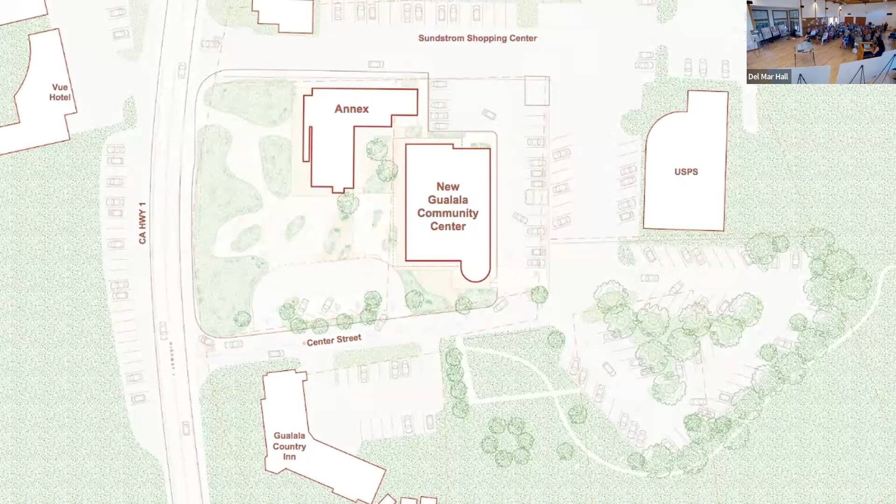In our proposal now, we are working under the purview of a rebuild, which allows by code a 10% increase in the floor area of the former community center. We've been in conversations with the planning department early on, and we have the opportunity to stay within the confines of the site, but we're able to shift the building down to take advantage of the views towards the Pacific without having to go through coastal commissions. This was a major win for us, because as you know, coastal commission takes a long time. We probably won't be around when it actually starts.

By shifting this southeast, we're able to conceal the parking that is much needed and necessary, but really take advantage of this new plaza that we've been working with our civil engineers and landscape architects to really make this an outdoor community park. This would start to frame the relationship between the new building and the ocean, but also create a new, more intimate courtyard with the annex that's there. This would be a multi-purpose space.

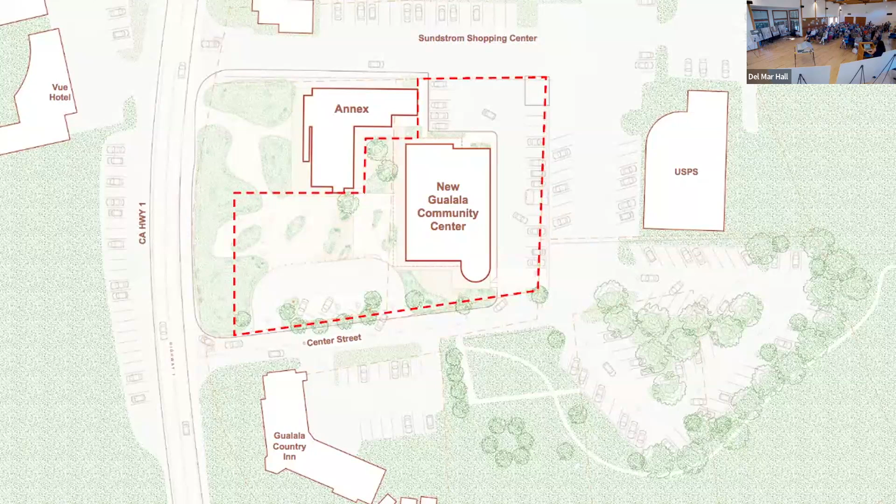We're also considering adding 65 additional parking spots for overflow, which historically there was never enough parking. So we thought this would be an opportunity to incorporate that in a more organized manner and provide more ADA parking spots than before, and also address some of the other issues in the site that needed to be addressed.

One other aspect we wanted to share and clarify: as part of this rebuild, we're also thinking about the project as a community resilience center. This definition is from the state definition. What we've discovered is there are many funding opportunities as well if this building were to comply with these requirements.

So this is not just a community center, but it's also a place for emergencies in the event that people need to come together. Part of these requirements involve being ADA compliant, gender neutral restrooms, and other infrastructural items fitting with today's standards: backup power generation, potable water storage, etc. By doing this—we'll go into more detail about the building—that just allows us to broaden our funding opportunities as well.

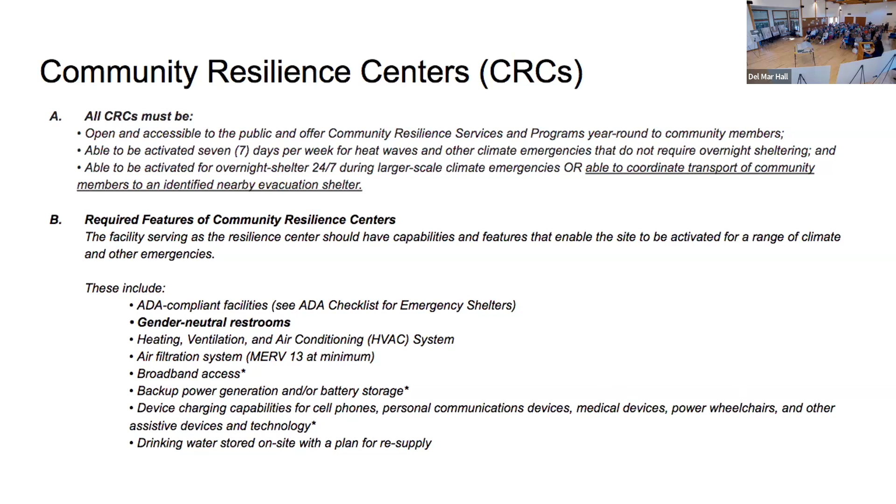And now James will walk us through the interior. Okay, I will talk about the plan organization for the building.

From a very high level, the building is composed of essentially two buildings in one. To the bottom of the page, you can see what is a large assembly hall. Separating that from the service bar at the top of the page is a gallery, and that gallery is the main circulation artery through the building, providing a kind of north-south axis. Most of the supporting service programs are on the top of the page, to the east, and the assembly halls are on the other side. That's the overall view of how the building is organized.

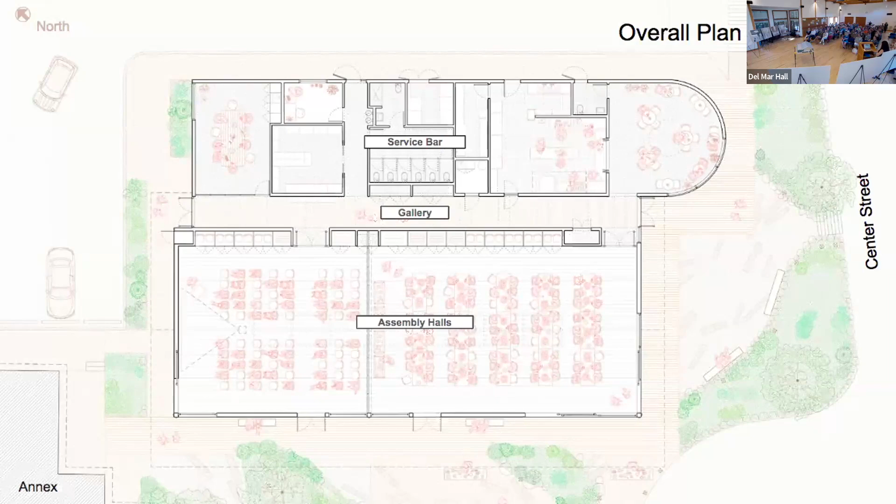We can go to the next slide. First, talking about the assembly hall: this is a flexible space for large assemblies. Part of what makes it unique is that it's capable of being subdivided into two spaces. What you're seeing here is an operable divider, a partition, that can help split the hall into a medium hall and a large hall. That flexibility was important because often there might want to be multiple events taking place of different sizes.

In this particular plan image, we're showing something like a dinner, a crab feed, in the large hall, and a movie screening in the medium hall. But you can certainly imagine many other types of activities could occur. If the operable divider is pulled back, it becomes a singular space which can accommodate a much larger audience.

Another aspect of this assembly hall: on the top of the page, lining that east side wall, is a continuous line of hall storage. Tables, chairs, a movable stage system are all stored in there, so they're very easily accessible. We understand that the center is operated by volunteers, so we try to make it easy for them to pull things out and put things away. That's quite important, and we're making sure there's enough room for all the storage needs for these events. That's the assembly halls at a glance.

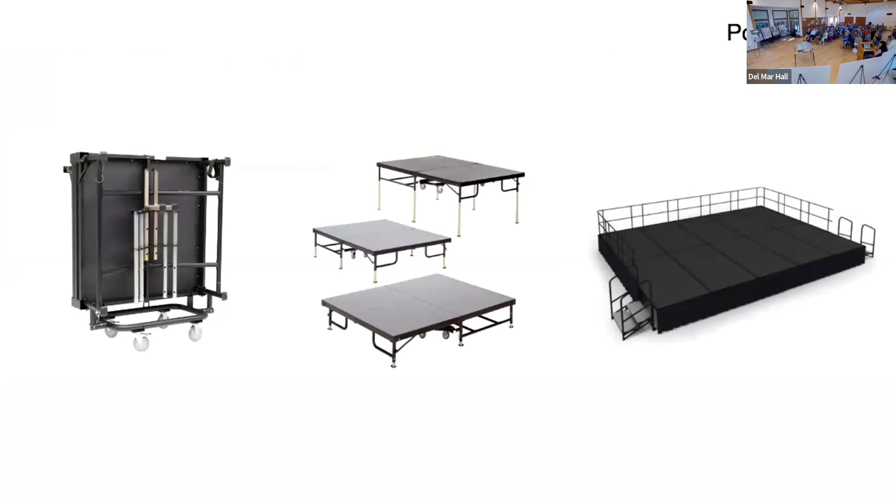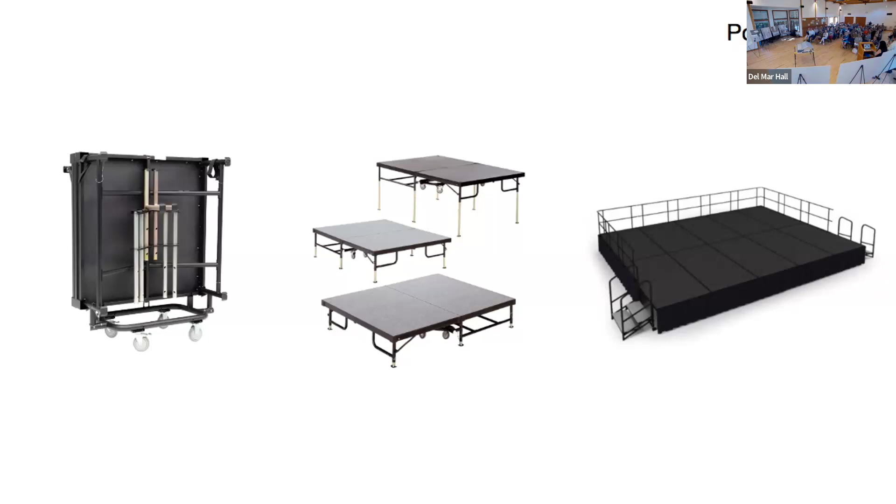This shows an example of what a movable stage looks like. The stage, when in storage, is folded up and on wheels, so it can be wheeled into storage and the space itself is much more flexible. When you need to have a performance, you can wheel them out, unfold them, and tile them together to create a larger stage, with dimensions flexible to the needs.

Moving on to the service bar programs. What you'll see anchoring the service bar on the two sides is a flex room and meeting room. Flexibility is really at the heart of the design. So if the assembly halls accommodate very large audiences, then the flex room and meeting room are used for smaller groups.

So even though we're calling that a meeting room, it could be used as, for instance, a yoga room, or a classroom for after school activities. The flex room is right off of the kitchen, so it can be a cafe if there's a luncheon with a smaller crowd. That's a perfect space to have direct access to the kitchen without needing to take up the entire assembly hall. Again, flexibility is at the core of how we program the building.

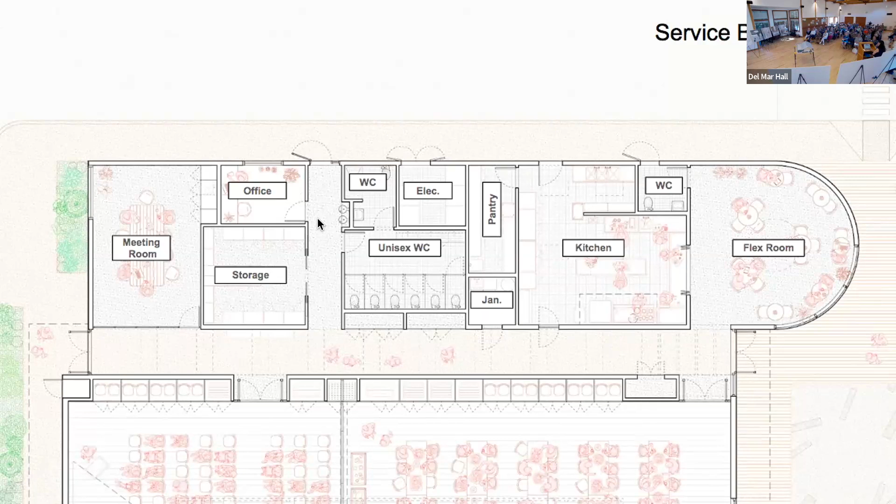Continuing to move to the left of the page, there is a service corridor that leads to a storage room and an office for staff. That rounds out the service bar programs.

Just for comparison's sake, it's important to understand how this new community center compares to the old one. The first set of columns describes the size of the previous community center. The main hall of that previous center was around 2,400 square feet, including the stage area, with an occupancy of around 165 people. For reference, this room we're in has a sign that says 158 occupancy, so that gives an idea.

With the new hall, the combined assembly halls have an area of almost 3,500 square feet, with an occupancy of 232. If we were to split the halls, the large and medium halls accommodate 136 and 96 respectively, and going down to the flex room and meeting room, 34 and 26 people. So we really created a series of public and community spaces ranging from small to medium to large to extra large. In pure numbers, it's about a 40% increase in size for the assembly hall compared to the old community center.

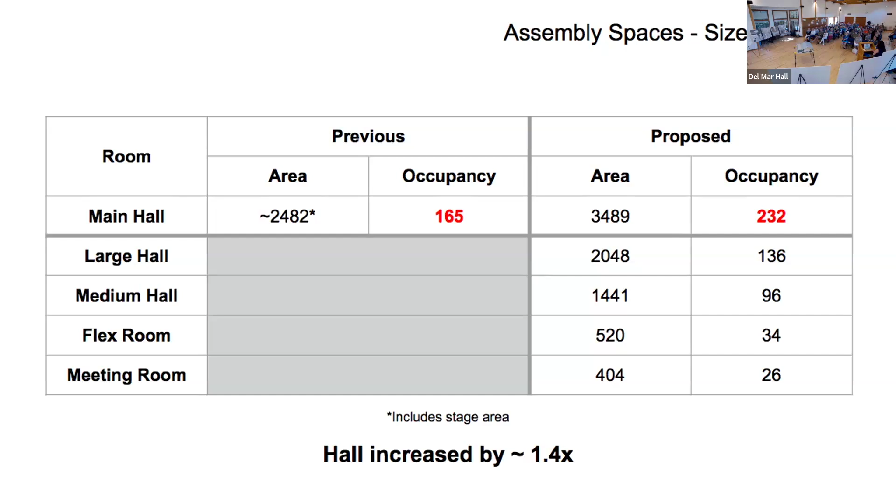Okay, now we're going to go to the bathroom and kitchen. I have the task of describing the bathrooms because we know everyone's really curious about these special rooms.

Let's talk about the big room, the multi-stall room. There are 6 gender-neutral bathroom stalls, each about 3 feet by 5 feet, and we're showing 3 sinks. Gender-neutral bathroom partitions are growing more common in commercial settings like airports and schools. Why we decided to do this was there was also, as mentioned earlier, the Resilience Center requirement, but also it's a way for us to gain a little bit more space, compressing all of these items so that we can gain more space elsewhere.

I want to show you - normally, growing up, going to school, when we had separated restrooms, there's usually about a 1-foot gap, which is fine if you're separated. But what we're trying to propose is to provide your own little room. So the gap between the bottom of the door and the floor is only a 1/2 inch, and the doors go floor to ceiling. The doors would have an occupancy indicator, and we're also thinking about making the restroom door glazed so you can see what's happening inside. These are attempts to give as much privacy as possible when you enter a multi-stall.

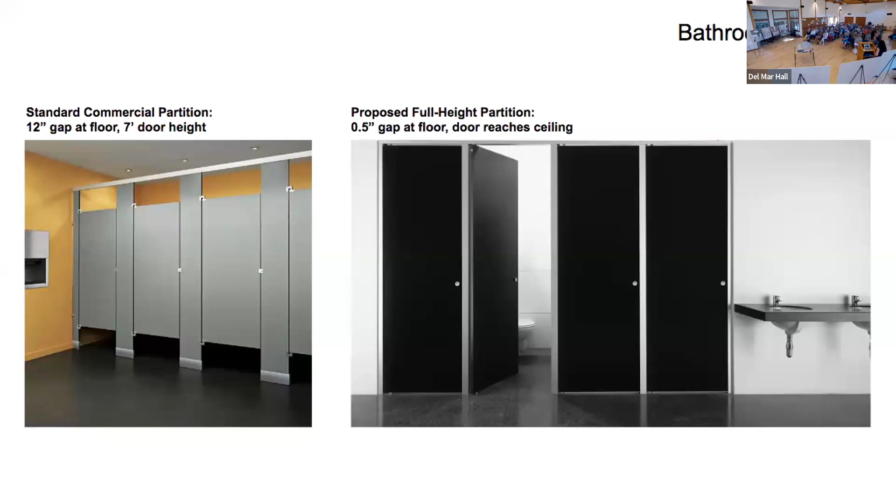So they will not look like this, and we are trying to make it look like the image to the right. Moving inwards, if you want more privacy, you can go into a standalone unisex restroom, which again, going back to the Resilience Center, we are introducing a shower.

For emergency use, there's also a changing table for families right behind the door. And if we go to the right, this is another single-use family bathroom that also has a changing table right behind the door. And as James mentioned, in the event that there are exterior programs, outside programs, and someone wants to use the restroom, this door would be open probably by keypad.

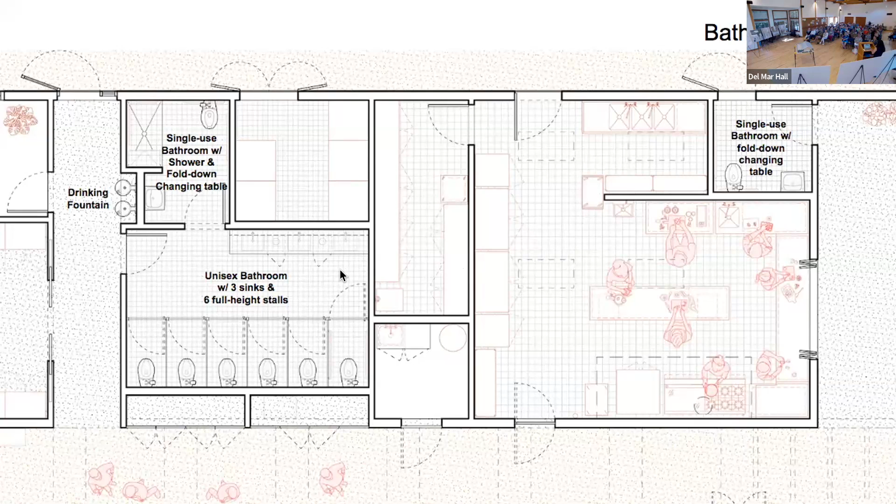So I hope that gives a little bit more clarity about the multi-stalls, and we can definitely go into more detail later. And now about the kitchen.

So the previous kitchen was about 270 square feet. This kitchen now is about 550. But we've been working with a kitchen consultant and members of the community to really understand the use of designing a functional commercial kitchen for all the events that can take place.

So within the kitchen, the double action door, there's the cook range, the oven, then there's a service counter to the flex room that allows the passage of food there, center prep table, there's a hand sink, a prep sink, and then just to the left, there's 2 sets of refrigerator freezers that are lockable. And then also there would be a 3-compartment sink with a dishwasher.

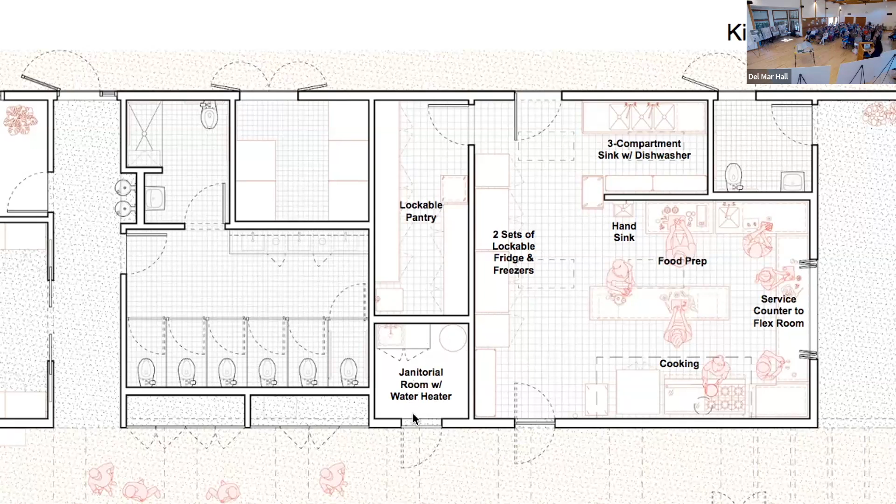So the messy areas are kind of isolated in one zone. And then there would also be a lockable pantry, so we can store all the abundance of ingredients and things like that. And then right next to it would be the janitorial closet, currently a mop sink closet that has a water heater. All of the services are centrally located so that it would be easy to maintain the rest of the building.

All right, now we're going to go to the fun stuff. The images are way better to look at. I will try to walk through the experience of approaching and entering the building.

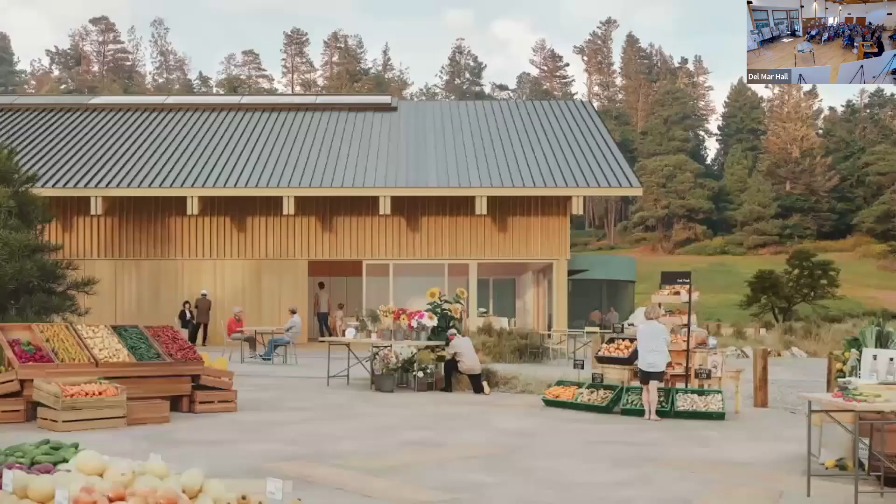Rotating around to the west face of the building, immediately behind this image would be the Pacific Ocean. So as you saw earlier in the site plan, the building has been pulled southward to give it more exposure to the ocean. So we imagine this space in front of the building to be, again, multi-use, flexible.

Here we're showing a farmer's market taking place. There'll be seating, there'll be landscaping. The pavement will be a combination of different pavements, but allowing for vehicular traffic for farmer's market stalls to set up. All of those things have been considered and accommodated.

And what you see here is more generous openings on that west side. So here we're showing a 3-panel window or door that slides open, that allows that inside-outside connectivity, as well as a view to the ocean. Okay, we can keep going.

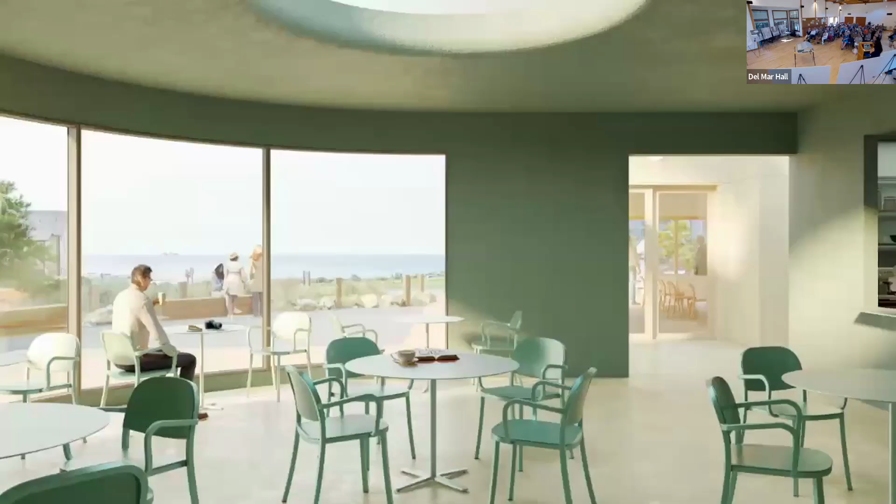So it's a sort of two-in-one function. Moving to the inside of that flex room, here you can see we're looking westward to that ocean view. The curvature of that volume, we think, is a generous gesture both outside, indicating that this is the entry, but also on the inside, it creates a panoramic experience viewing towards the ocean and the landscape to the southwest. This room is also graced by a very large 8-foot dome skylight.

Here in this image, we're showing its use as a cafe. So whether you're a visitor or a local, you can come here, get a drink from the kitchen, and enjoy the ocean view.

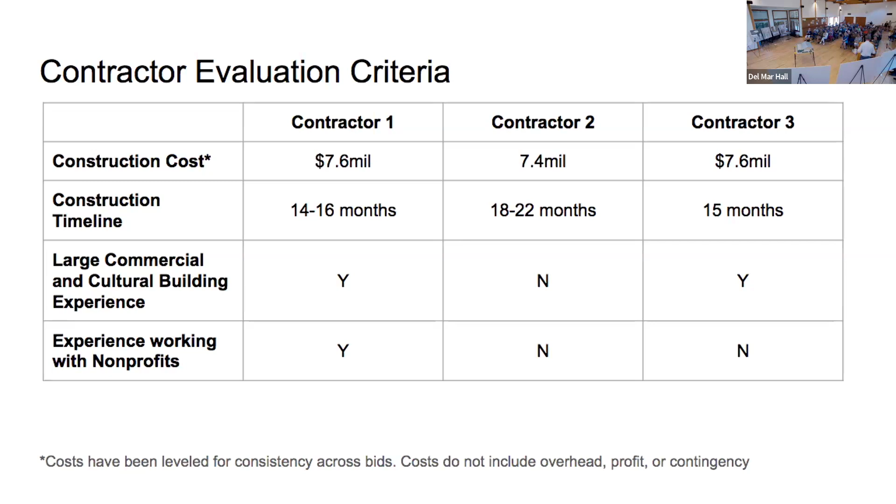Thanks, Kevin. I'm just going to touch upon what value engineering is very quickly, because that may be an esoteric term for some of you. So value engineering, or VE, is really a systematic process that identifies areas in a construction project to reduce overall costs, without compromising quality or functionality.

So we will be looking for equivalent things that cost less. As an example, the areas of analysis include material versus labor costs in various construction scopes. If we're talking about materials, that might include things like decking, siding, casework, roofing, skylights, windows, doors, flooring, acoustic panels, kitchen equipment, HVAC, lighting, AV. I can go on — there are literally hundreds of things that we will look at.

In every case, there is both a product we'll look at and alternate products that function similarly but cost less, and also vendors — certain vendors will sell the same product for less or more, so we'll find that as well. That's on the material side. On the labor side, we're going to be looking at various subcontractors doing various scopes, assuming they're all qualified for the job, but they might have different costs for their labor.

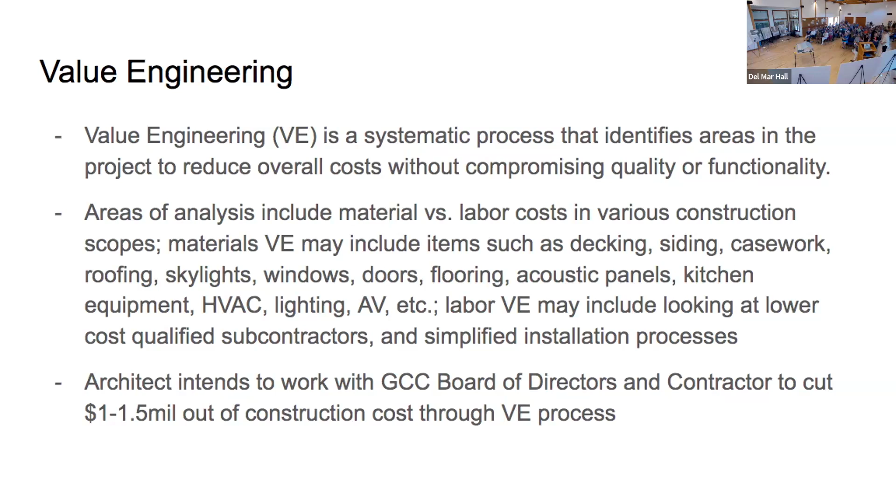Thank you. So it's been a long year sitting here—I'm caught up in the presentation. I see a lot of familiar faces and new faces. We are here tonight in a really unique position.

The Gualala Community Center has raised money and given it out—scholarships, and donations to the food banks throughout the pandemic. We didn't lower our funding, even though our main source of revenue, pay and take, had shut down. We didn't stop or reduce our funding; we kept giving it out. So we find ourselves tonight in a very unique position of raising money for ourselves for the first time since 1954.

We've identified that we'd like to raise a significant amount of money—$4 million. As you saw, construction costs sit right around 7, and we're going to try to optimize that down to 6. We have 2. Our goal is to raise $4 million to make this a reality, and I really think we can do that.

We've identified 3 pillars to generate those revenues: direct donations, fundraising, and grants. Many of the components we see in the build have now allowed us to apply for these grants—competitive private and public governmental grants. We feel like, for the first time ever, we have strong representation in that arena.

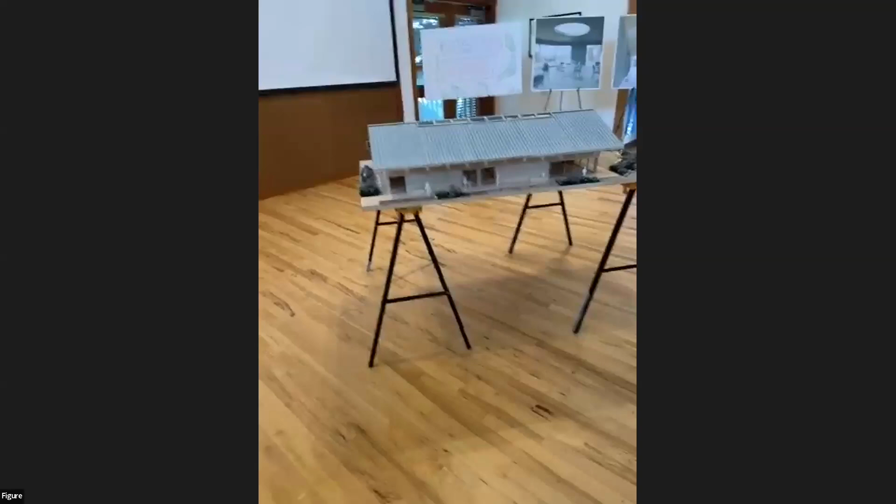So we're going to try to do a live walkthrough of the model. This is unrehearsed, so we'll try our best. Let's stop sharing here. Oh, there it is—there we go, yay. It's a little meta here. Vertical or horizontal? I think for everyone—yeah, sorry, stay the way you are.

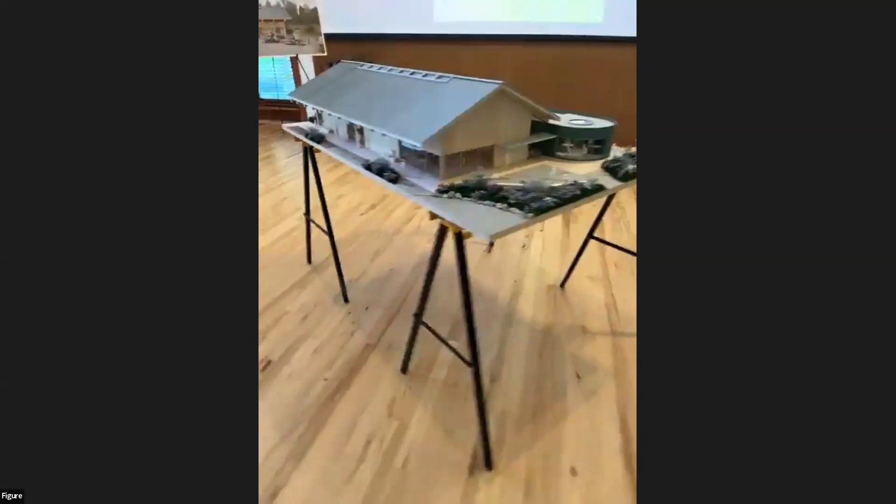Okay, let's start over here towards the entry. This is the southeast entry—a 5-foot awning that's 8 feet off the ground. In case of a storm, this will provide additional shelter from the rain. This projecting eave also extends almost 11 feet beyond the building wall, which starts to create a covered porch. The ocean is in that direction, so along with the decking on the ground, it really becomes a nice space for respite, for sitting and chatting, with that generous connection to the ocean.

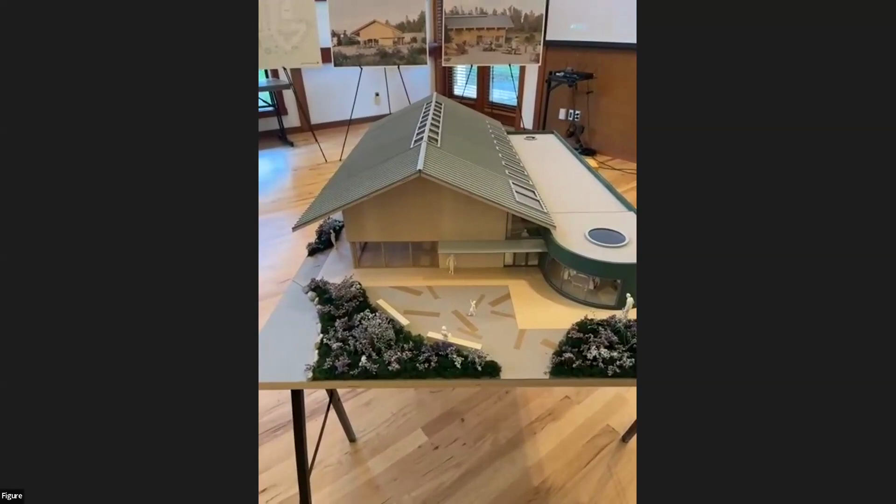Additionally, in the landscaping here, you can see our landscape designer, Teramoto, has designed these landscape areas full of indigenous, drought-tolerant plants, and in the plaza spaces there are timber benches for sitting.

One more thing, here you can see that flex room with the curved window and curved space beyond. And if you peek really kind of in there, that is the gallery hallway that skewers the building.

So I'm actually now going to attempt to open the building. Give me one second.

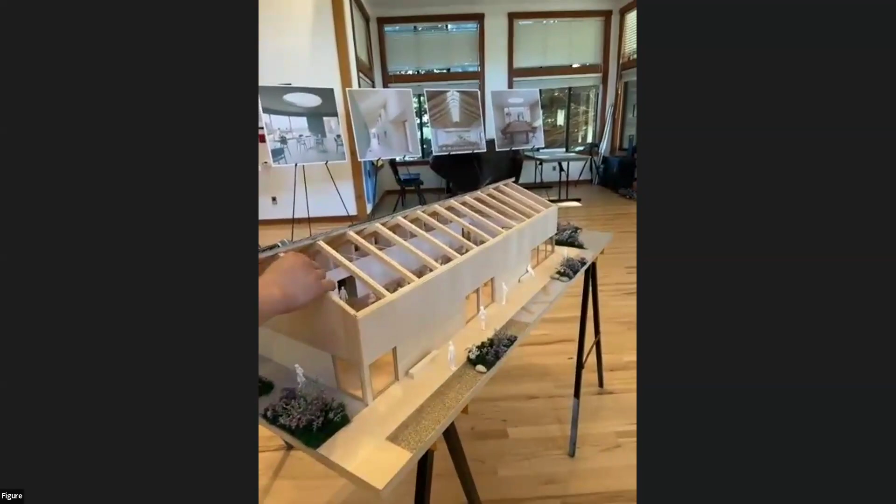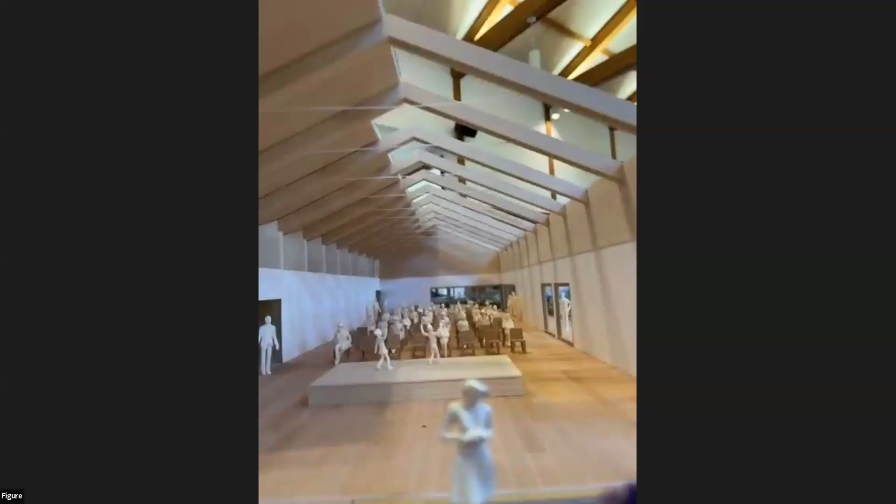Now you can take a peek inside the assembly hall. Here we have a children's dance performance happening on that portable stage. The hall has been combined into one space. We hope that after the presentation, you come up here and take a look, take a peek inside the model.